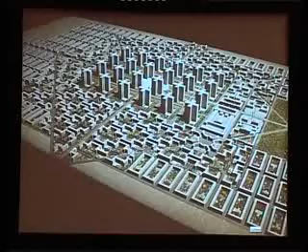The second image I want to reference is the Ville Radieuse, the Radiant City of Le Corbusier—much maligned, but with many of the first ideas of sustainability. In this new city he was creating outside Paris, there were offices, retail, residential, institutions, even factories—everything needed to function internally as one city. There were obviously certain aspects of human values and quality of life that were questionable, but when you look at the residential district he was creating, you can see that parks, schools, and gardens are all shared, happening in courtyards where all these facilities are shared by residents.

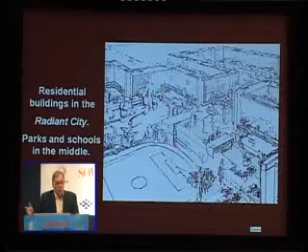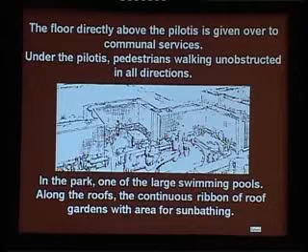He even had green roofs, much like what we talk about today, and you could actually connect the buildings one with the other—you could run on the roofs of buildings and connect them all as one. Of course, there were issues of scale. In fact, the buildings were elevated so you could walk under them and air would flow beneath. I'm not advocating the continuous wall he was creating, but there are many aspects of these principles that we often look at today.

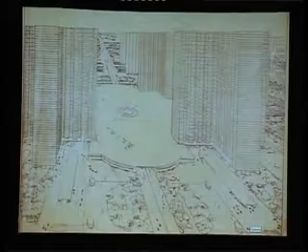There were funny aspects to it also. He was trying to connect this city with other cities and internally with a huge transportation system—cars, trains, airplanes, helicopters, everything converging. In fact, in 1920 when he created this, there were no large planes, so he thought this was an airport and that airplanes could land in the middle of the city, as you see in this platform.

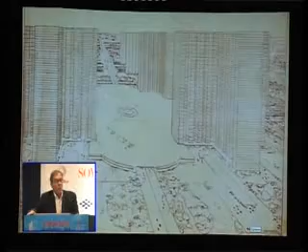When we look at La Défense in Paris, a place where our office is involved in several projects, and more recently in rethinking what La Défense will be in the future, even La Défense is reconsidering some of these principles. But La Défense is essentially that platform of the Radiant City. Here you can see the giant platform with very little shade, no light and darkness, no contrast. There's a giant platform, you arrive from below, and there's no human contact upon arrival with the space. You're essentially in an underground under this raised platform, and all of this is part of the questioning today.

But if you look at this image, it reminds us of the Radiant City. You can see the existing residential neighborhoods around in Colombes and other cities around La Défense, and the center core of office buildings that are tall, while the residential was mid-rise, almost identical with a big platform.

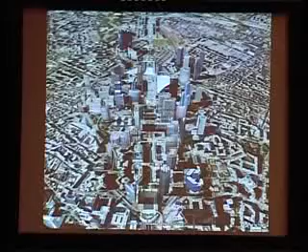But this view also tells us about density versus open space, and how the density of Paris allowed it to have mass transit. Today in Paris, you don't have to walk more than 300 yards, about 300 meters, to a transit station or a bicycle station. There are bicycle stations where you can pick up a bike and deliver it somewhere else, at a maximum distance of 300 meters, so every subway station and bicycle station is 600 meters apart. And it makes it one of the most sustainable cities.

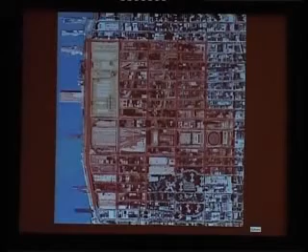And I'll pick another example before I show you a new city in New York. These are the Hudson Yards, 60 blocks of the city. When our firm started the replanning of this other new city inside the city, we counted a total of 25 trees in the 60-block area in the survey that we did. And we came up with a whole new plan.

But when you see what is New York, doesn't it remind you of that image of Paris? A huge amount of green space, a lung for the city in the middle, and extremely high density in the perimeter, which permits, again, transit to allow people to go around the city without the use of a private car. It is this notion...

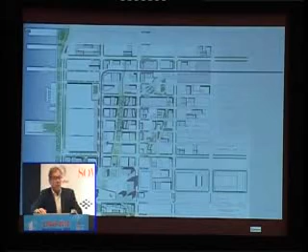And you wonder why there aren't more green roofs in New York, but there is one thing about New York that is great: it is one of the first cities that actually have what I would call urban agriculture. And we learned how Singapore nowadays is looking into urban agriculture, because its acreage for production of food has gone down so highly, from something like 15,000 to 1,500 hectares of land left in Singapore.

In New York, you notice that we created a linear park that traverses these blocks and creates a whole new green belt around which the dense buildings are lined up, creating a green zone that eventually bends and goes all the way to the Hudson River, connecting to the parks that have replaced the ports. Everything you see here is over rail tracks, many of them decommissioned.

But the most important aspect of this project is that other L-shaped line, the number 7 line, that finally brought mass transit. This so-called Hell's Kitchen was called precisely that because it had no access to the city. New Yorkers are the ultimate green people—they will not go where there's no mass transit. And the city will not develop; there will be pockets of dead city as a result.

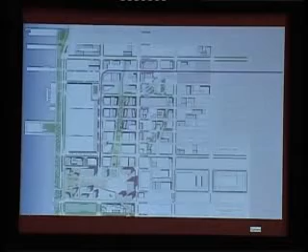The extension of the number 7 transformed the west side of New York in Midtown into what will be this new master plan with open spaces, green spaces, and major buildings that will transform the place.

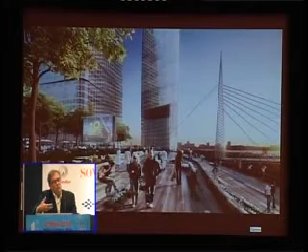Reusing infrastructure is probably one of the great tenets of green design. There was the High Line there, a rail line that was elevated, which became a park. This park now traverses all these neighborhoods. People can go jogging for blocks without having to stop at a crossing, and it actually goes under and through buildings—an amazing example of reusing existing structures instead of demolishing them.

It's not new—even in Paris, where there was also an elevated viaduct, shops were introduced below and a linear park was above. In fact, New York is the second place in the world where a rail line has been converted. I'll show you a few other examples of projects we're involved in.

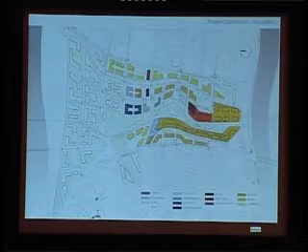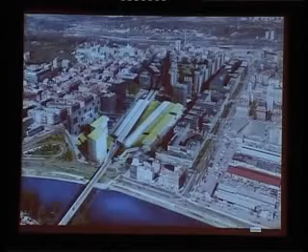This is in Prague, where the rail yards are being redeveloped by Orco, the development company, into a whole new city right off the river across from downtown. These were all rail depots, maintenance yards, and factories that are now becoming part of the city. In the middle of it is a major train station that will connect the TGV to Paris, where we will meet the internal railroad metro that goes through the city of Prague.

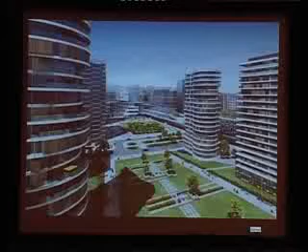You can see the internal park in the center, and the mega project we are currently designing, where the train station will occur that feeds into the city and into the neighborhood.

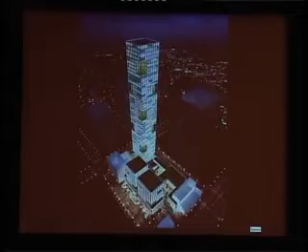Why is this? Because Brazil doesn't allow any public transportation that doesn't use ethanol—it's all 100% ethanol based. It doesn't pollute, and it's an amazing way of solving the transportation problem in a developing country where the money to create a subway system is extremely high.

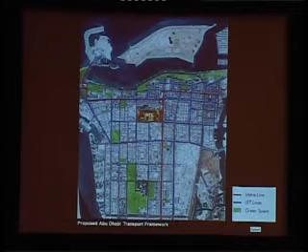This is not a new island or some new construction in the outskirts of the city that you have to go to. It's smack in the middle. One of the great things about it is that these were the original palace grounds of the elder ruler of Abu Dhabi. His palace was in the center, and the surrounding space was his experimental garden, where he had a botanical arboretum, experimenting with trees of the desert, and in the other half, an agricultural field where he tested the growth of edible plants that could grow in the desert environment of Abu Dhabi.

It is also commendable that the family decided to turn this into part of the city, instead of keeping it as a palace occupied by one person. The ruler moved to a palace outside the city, and now this will become part of the city.

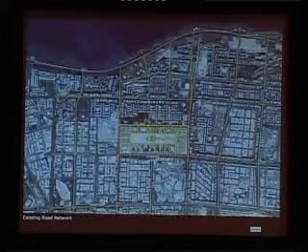You can see that we're trying to connect to the city grid and precisely avoid the notion of only arteries and no veins. You can see here how the project fits into the city itself with a central park with urban agriculture. It will have actual agricultural fields on one half of the site and an arboretum with trees and other species on the right-hand side. It will become the centerpiece.

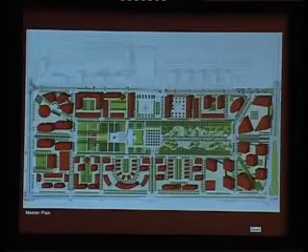The building, the old palace, will be converted, not demolished, into a museum. The buildings that surround it create a variety of lifestyles. There's high-rise office buildings, high-rise residential, mid-rise, low-rise, townhouses, hotels. There's every aspect of city life occurring around this central park.

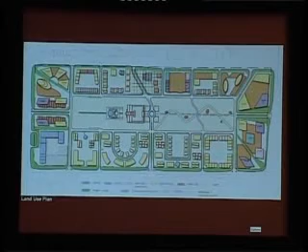In this analysis of the uses, the colors signify different purposes and different uses to create a total city within these 15 million square feet. And how the streets are positioned aligned with the surrounding streets so that traffic can actually flow through the block instead of having to go through the perimeter, an edge road in the city.

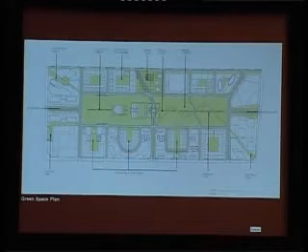You can see here there's 40% of the space that is open space, and this is important because the temperature drops significantly. A green space is about 70 degrees in the heat of a desert, but a solid space is actually 140 degrees. That is, 50% of the heat will be absorbed by soft spaces that are green spaces. And that's why the project has a significant percentage of green roofs and other components that are soft.

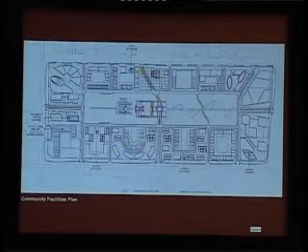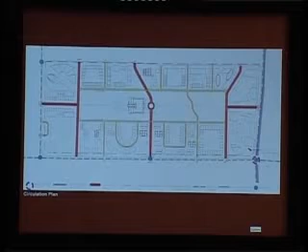These are some of the institutional aspects, but more importantly is the transport. Notice how it is surrounded by public transport in the city. There's a subway station, the major rail at the corner, a high-frequency road to the right, a high-frequency transit line on the right, and a light rail that surrounds two other sides, and we have an internal loop with a small tram that takes you around the different properties within here.

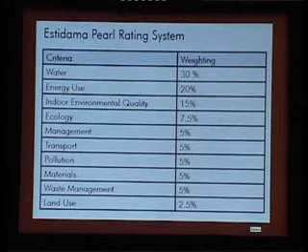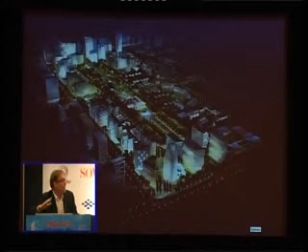This is the view of what we call Al Manhal will be. Adjacent to it, we are also the architects and planners of the adjacent block, which is another 50% of it, another 7 million square feet, creating a whole new city. I mean, cities are often created of that population, and it need not be a new town somewhere at a long distance. It can actually happen in spaces that are decommissioned in the center of cities.

This is the botanical garden and the agricultural garden in the center of the site, and you can see the palace and the botanical garden that is entirely made of plants that do not need irrigation, that are natural to the place.

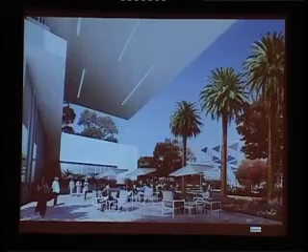And these are some of the other views of the different aspects of the streetscape, including shade trees that help control the temperature, overhangs that protect from the sun, and arcades that connect the buildings undercover so people can walk from building to building protected from the sun.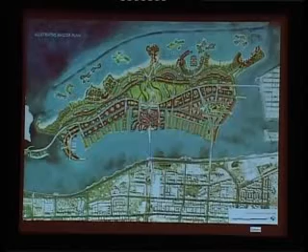on the resort economy along the waterfront with beaches and islands, and on the inner side of the island, residential neighborhoods that feed the city. These are quite high density residential. There's a population of about 35,000 people that will occupy this island.

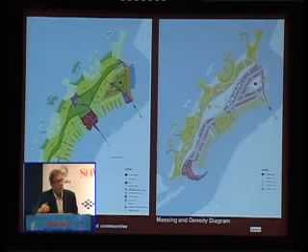It is low rise in the sense of a Parisian low rise, but with significant density within it. And you can see here the land use plan with the mixed uses,

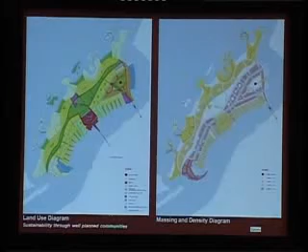and it goes all the way from homes to mid-rises to very dense neighborhoods. As you depart from the transit lines that you see in this transportation analysis, the density drops because people in

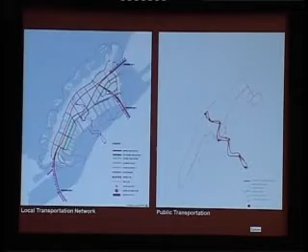homes are less likely to use mass transit, and you go to higher densities as you approach the mass transit areas. We did a plan, like we did in Al Manhal, of all the uses and the use of

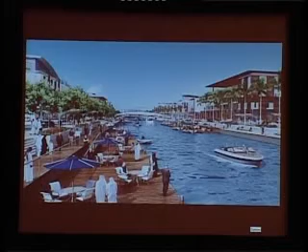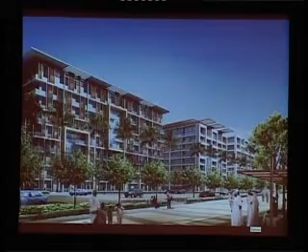the canals as activators and the water's edge. And these are some of the different views of the project as it was being developed. You can see here the various densities of buildings and fairly dense blocks around open space, including office space and residential and other uses.

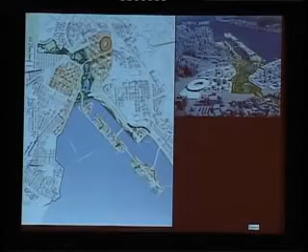And there are other very commendable efforts in the reuse of infrastructure. In Hong Kong, at the old Kai Tak Airport, the government is planning a whole redo of that airport into a part of the city. We are not the planners of this, but we've learned about it through the project that we're involved in right there.

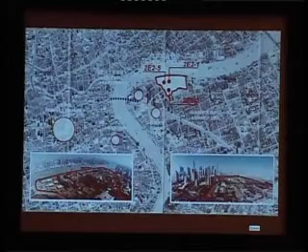And another great example from China is the creation of cities directly adjacent to existing city centers, trying to use the energy, infrastructure and life of cities as part of the expansion of a city. Pudong was probably the best example, and this is another one of those places where we're involved in various projects.

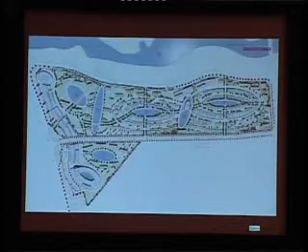And we do create whole new towns, like this one in Shenyang, also next to the city at the convergence of the rivers, one of the new projects we're involved in. And I do have to say something important on the sustainable side about Chinese cities. I promise you this is the last slide.

In China, they understand the value of the sun, wind, and orientation. We talk so much about producing energy, but more important is to save energy. In fact, if we save energy, then we don't have to produce as much.

In China, every residential unit has to be oriented to the south, or no more than 15% off southern exposure. That is, every residential unit gets sun even in the northern climates of northern China.

It helps with radiant heat in the winter. It gets natural light, and we all know that daylighting is probably the biggest contributor to savings in energy.

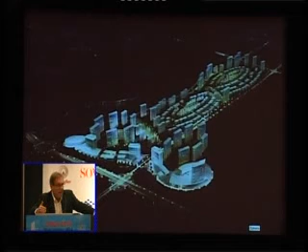In Europe, there's strict rules on the depth of a building between the core and the edge. Everybody has to have an office right next to a window. Everybody has natural light,

and that reduces enormously the consumption of electricity. Not only do they not use the power of the lights, but the lights generate heat, and they themselves create more need for air conditioning.

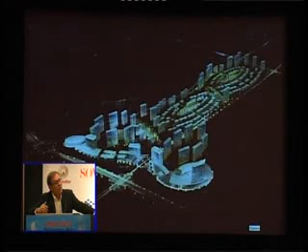And the Chinese, in our experience in China, have been amazing in their sensitivity towards the value of the sun in planning.